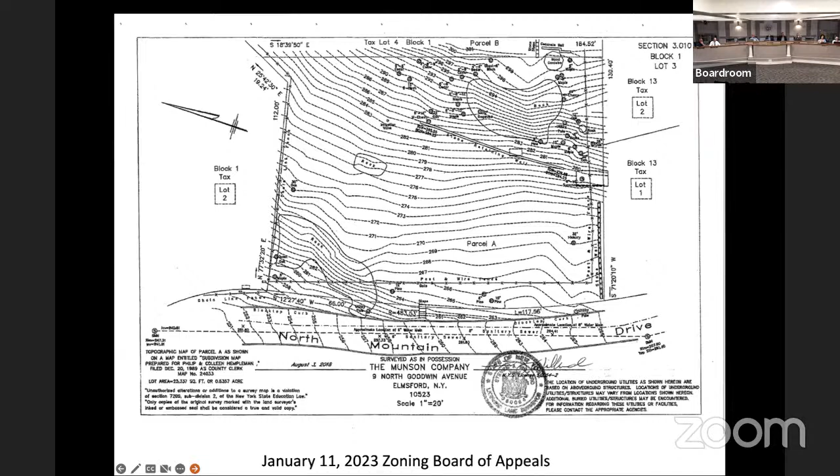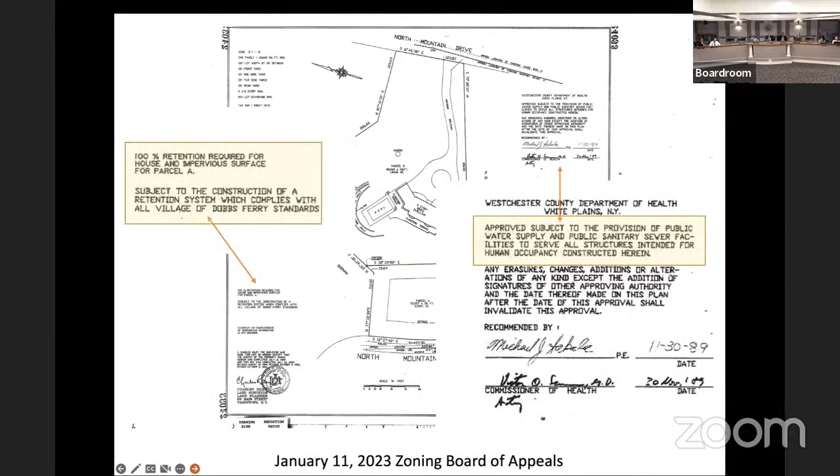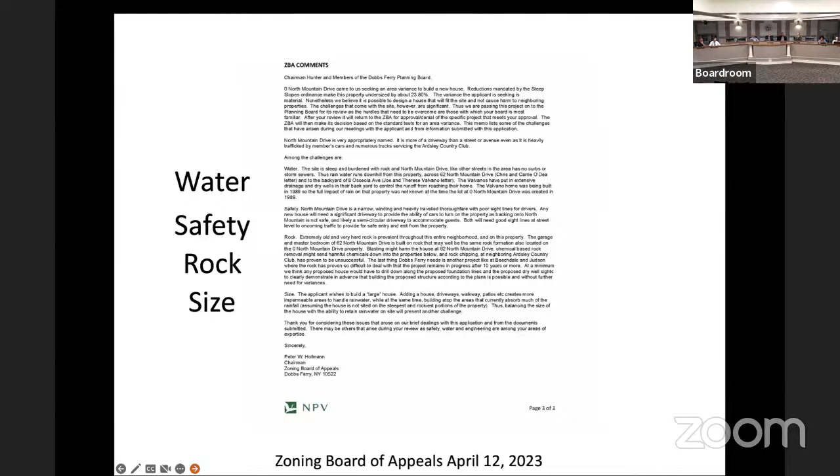So what we got when we went back to the planning board was the comments that this board put forward, which really identified water, safety, rock removal, and the size of the house and how it's going to relate to the site. What we did then is we broke that into a series of things that we went into deep investigation, brought in engineers to work on all of it.

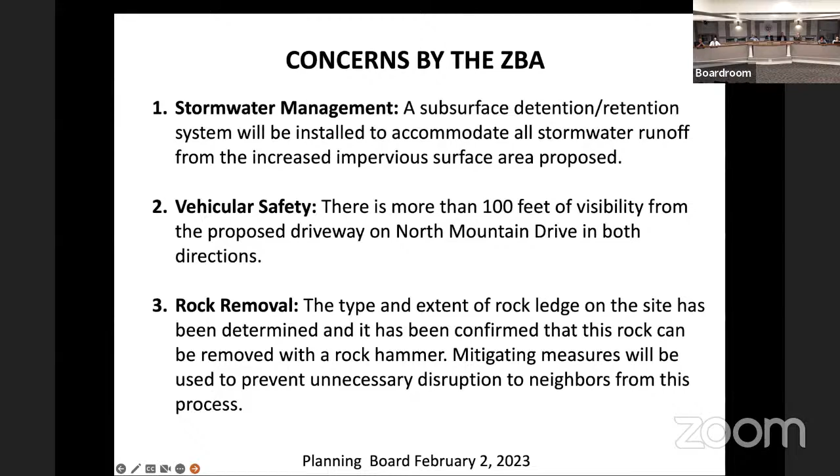We broke those down into stormwater management, vehicular safety, rock removal, the size of the house, site stability, landscaping, and then at the very end, we ended up adding contextual compatibility because there was some concern with how would this house fit in with its neighbors, which of course is important to the planning board, I believe also important to this board.

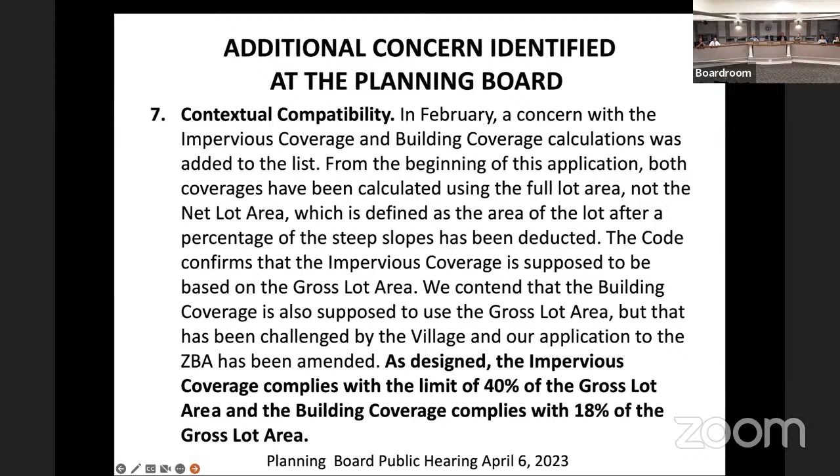As I understand the second issue, and I'm not going to talk about it, but we did design it to be 40% compliant, 40% of gross lot area for the coverage, impervious, and 18% for the building coverage of the gross lot area. So that'll be a different discussion.

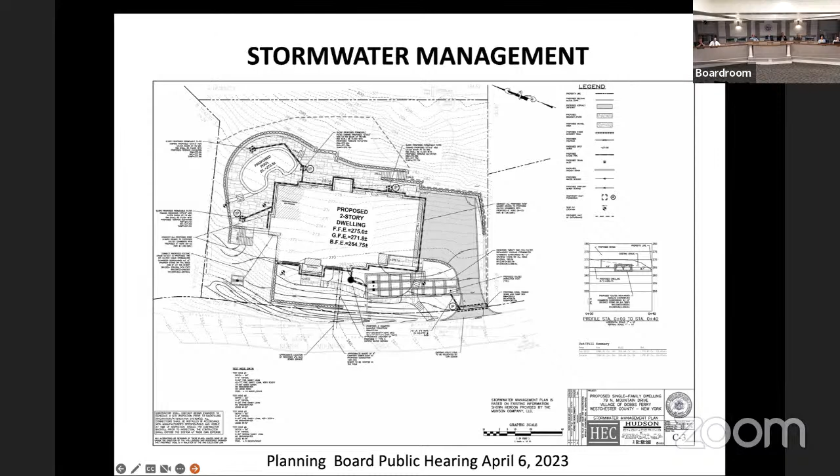This is the drawing that we produced that was done by Hudson Engineering that actually shows the answer to your question. Mr. Gutman, the Cultec units are actually sized out, the location, their placement on the site, everything that has to do with solving the water for full retention on site, not an overflow situation, not doing a percentage of it, which is actually the standard. This holds all the water that we're taking on site that's falling on impervious surfaces that we have and controlling that on site.

One other thing I'll just say quickly is Hudson Engineering did their whole study on the assumption that all of the surface area we were creating was impervious. We actually designed all of the paving on site so that it is fully pervious, not just one of these things where water can get between the two rocks, but actually there's a real space. And then we put additional gravel below that so we can hold all the water that falls on the terrace on site without depending upon the system that the engineers have designed to lose that water. So we have a factor of safety of like 30 or 40%.

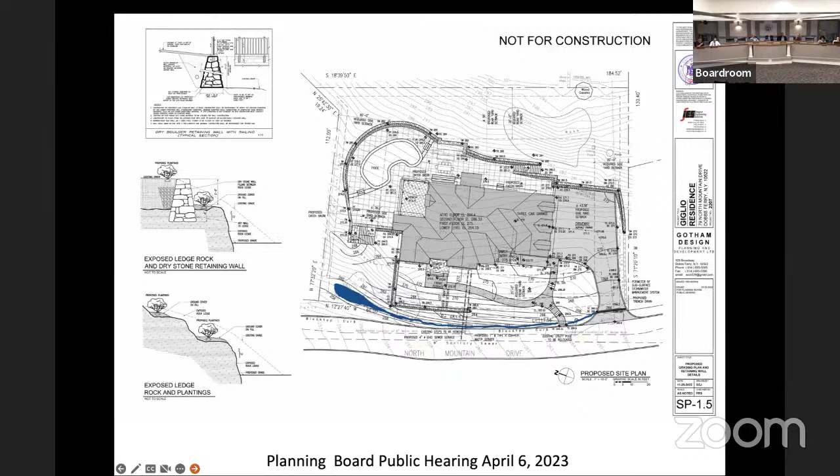We then took a look at the concerns and comments that were mentioned, and realized that, well, we're capturing all the water that falls on ours, and one of the concerns expressed was the water right now is shedding down the site. There is no curb, it's jumping the curb, going across the street and running down the hill. So what we did is we actually created a swale along the street and a drainage basin that's a backup system. So if any water gets around something, we're still controlling it on site. And that basin is fully on the property.

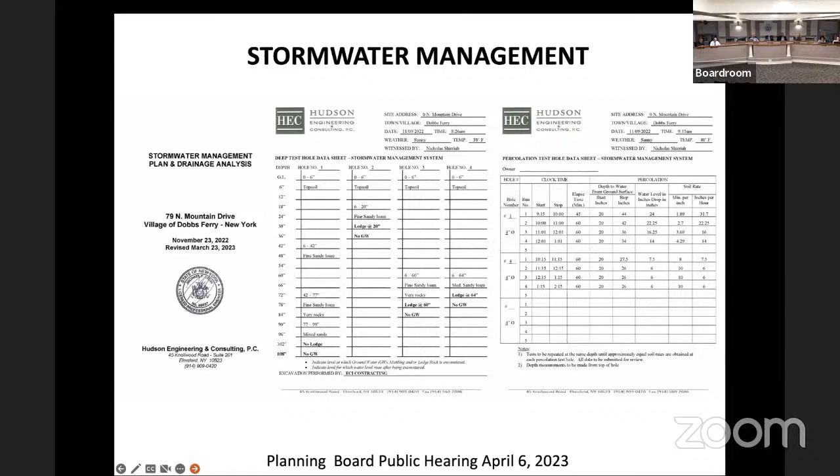The stormwater management design was based on a full stormwater management plan and drainage analysis prepared by Hudson Engineering. They actually did the perc tests. They did the deep hole test. They found the areas where these Cultec units could be placed. So they did a full design. It's not hypothetical. This should be considered what you'd have as completion for your project.

So the important thing in the stormwater management report is that the system is designed to fully accept, no release, the entire stormwater runoff volume for the 100-year storm event from the watershed and exfiltrate the runoff into the surrounding soil. So that's the definitive statement made by the engineer.

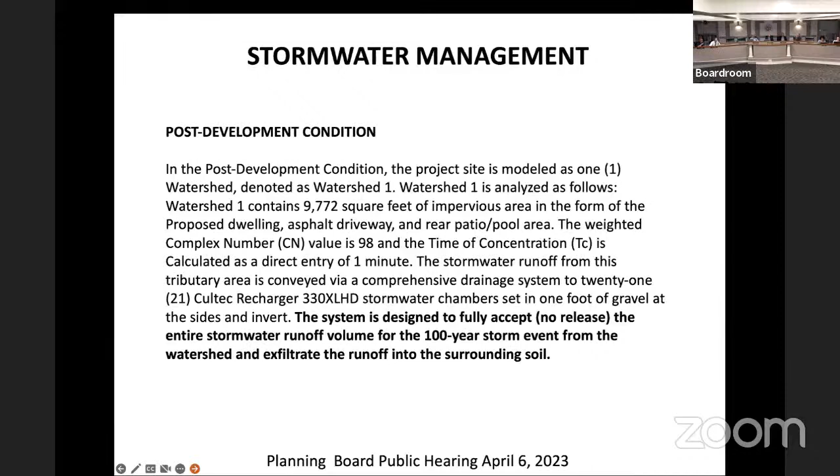Concern with rock removal. This board mentioned that. We were aware of a property in town where they've been removing rock for 10 years or something. It's crazy. So what we did is we took a look at what the actual capacities, quantities, and process would be for rock removal. We went into a full analysis of that, and Hudson's role in that was to confirm our quantities and the details on that, as well as to put together a fairly sophisticated erosion sediment control plan, so that during construction, if we have water running on site, we're not adversely affecting neighbors. So from the start of the project going forward, it's all going to be dealt with.

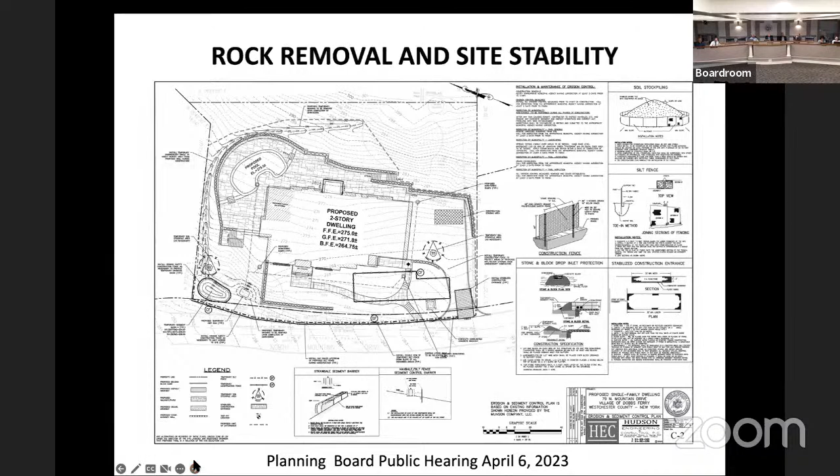We prepared a report on the excavation and mechanical removal, calculating the number of trucks, frequency of the trucks, size of the trucks, size of the equipment, how it would be handled. And we had that reviewed by our structural engineer, Sirus Miandoabi, who attested that all of the numbers in there were accurate and reasonable for expectations of what this would really entail.

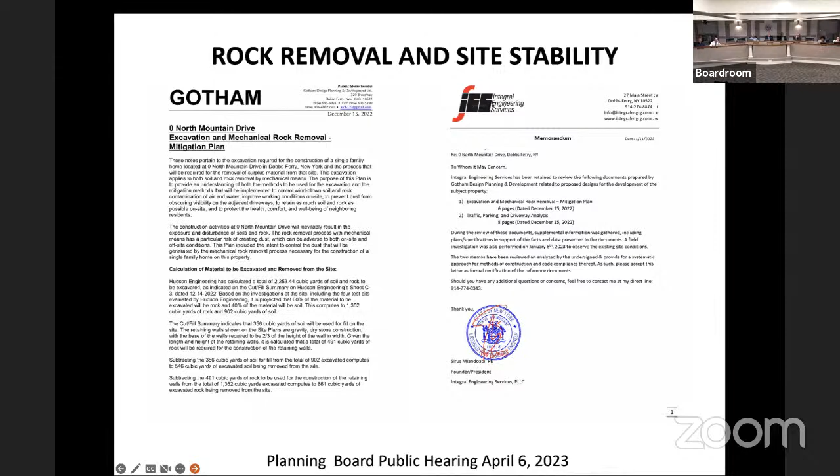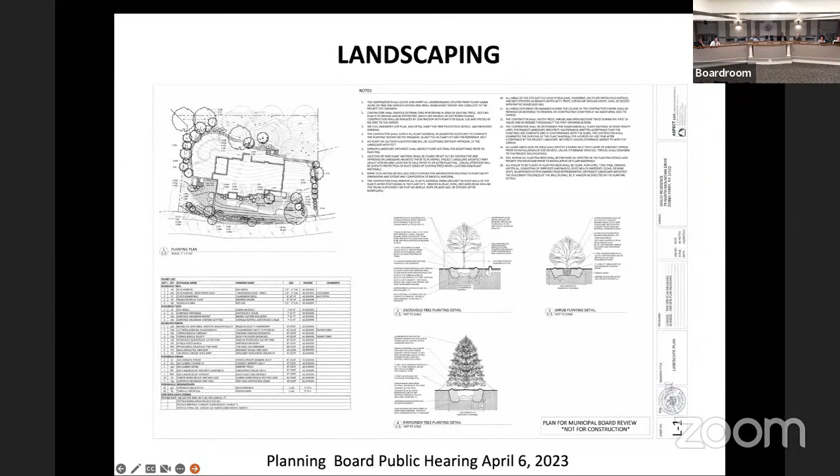Another concern that was expressed at the planning board, which I think was one that you actually mentioned at one point, is the extent of landscaping. This is a rocky site. Can it accommodate robust landscaping? And it can. We've actually had the landscape architect, Susan Janchil, do a full landscaping plan for this project, including screening for all the retaining walls and anything else that we're proposing to build. So that's been prepared.

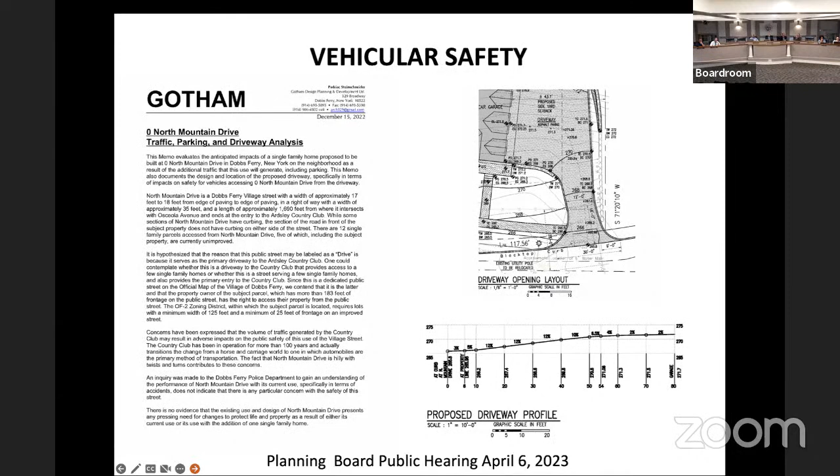Vehicular safety came up. This is a driveway, if you will, to the country club. There's significant traffic that uses that road. We're proposing a driveway that's going to come onto that. Is it safe? You have visibility in both directions. So we designed the driveway. We have pitches on the driveway that meet all acceptable standards.

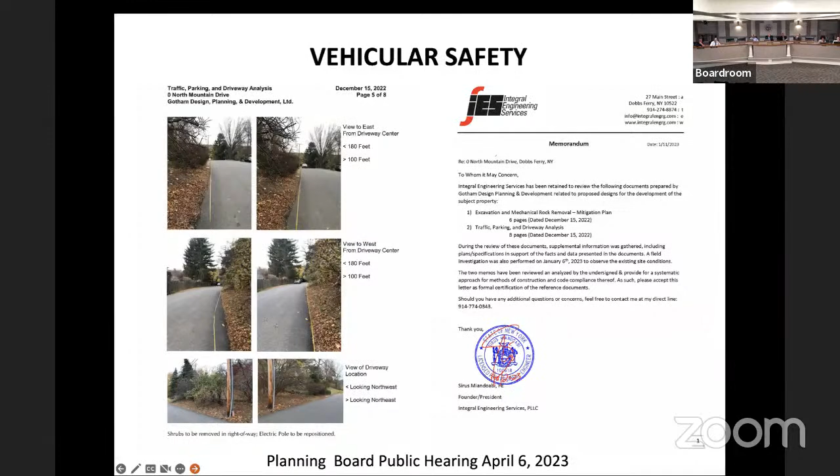Actually, we took photographs with the tape. So we've determined that we have more than 180 feet in both directions, which would accommodate cars going at 45 miles an hour without any question, still be safe. I think anybody who's driven up there knows that people should not be driving more than 45 miles an hour up there. I think 25 is the posted limit. And again, this was reviewed by Sirus Miandoabi and determined to be consistent with all engineering requirements.

The size of the house and the context compatibility. We did 2 reports on that. One, analyzing the building and impervious coverage calculations, which I think will be a comment for the second part of this. And the other is the context limit area and how we compare to neighbors. And we determined that of the 11 parcels that we evaluated, 6 of them, the houses were larger, 4 of them, the lots were smaller. We're kind of in the middle in all of that, which I think means that we're in a reasonable position with the context of the neighborhood.

We actually did get a letter from one of the neighbors expressing a concern and voicing a positive that this house will fit in well with the character of the houses in that neighborhood, which is an unusual character. Usually we're talking about houses that are going to look too big. The fear there was the house was not going to look like it really fit. In other words, not big enough. I think we've got it working fine. And we got 2 letters delivered to us, one from the O'Connors and one from Josh Weiss and his wife, that were favorable to the application.

We also, at the last meeting, talked about how we've had our engineer do all this stuff. It's been reviewed by the village's engineer. The neighbors also hired an engineer. I don't know if he's on tonight, but he appeared at the planning board and he gave a fairly positive reaction to everything that we're doing.

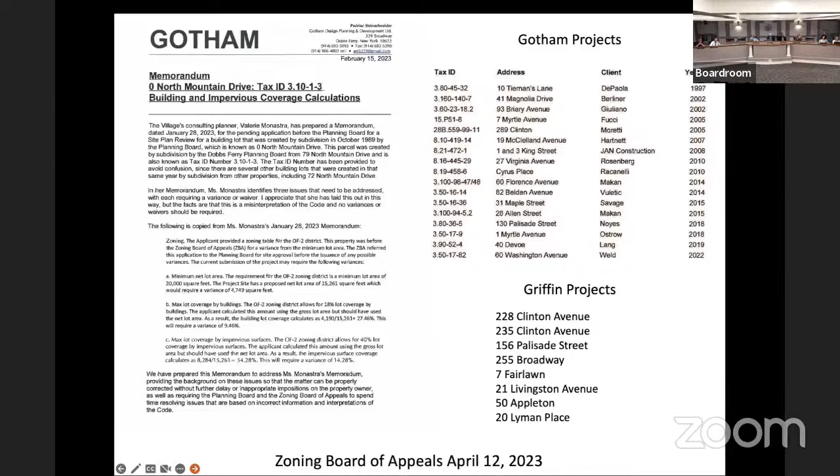The only thing I'm going to say about the coverage calculations is I've been doing work in Dobbs Ferry since the late 70s. Since the steep slopes ordinance was adopted, all the projects we've done, except those involving a subdivision at the same time, both the site coverage, impervious coverage, and building coverage were based on the gross lot area, not the net. Christina Griffin was here the other night when we made the presentation. She sent me a list of the 8 projects that she's done the last couple of years, which similarly used the gross lot area. So I don't know if that factors into anything, and I don't think you want me to waste your time showing you the pictures?

Okay, just checking. They're nice pictures, beautiful houses. We've had a long time to learn about this. Yeah, so they're all great.

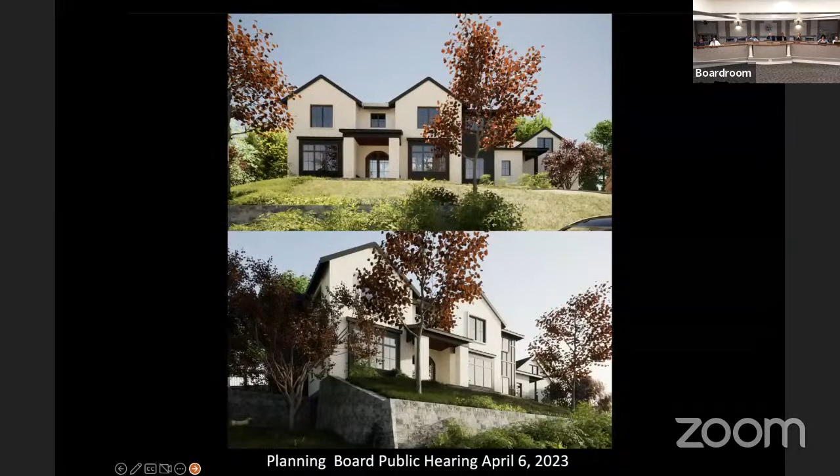And then the pictures that we've developed of the house that we're proposing and how it sits into the site. I think it's a house that looks appropriate, fits the site really well, and I think it would be a positive addition for the community.

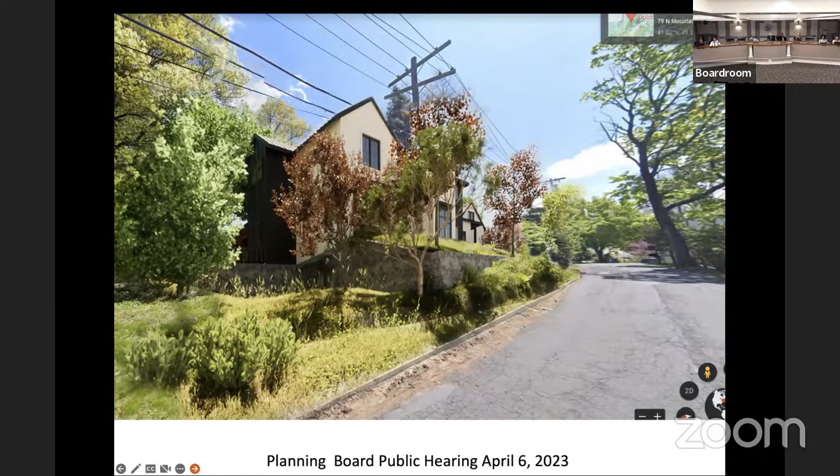Okay, is there anyone else who'd like to be heard on this application? Sarah, anyone else from Zoom land? Okay, why don't you put them forward?

Hi, good evening. I'm Jim Anacarico with Cronin Engineering. I was retained by some of the neighbors to follow along with the project from the very beginning.

Turned into mainly just looking at stormwater, possible negative impacts regarding stormwater to some of the downstream neighbors, particularly the Valvanos at 8 Osceola. Was happy to report back to them that the planning board and your village consulting engineer really held their feet to the fire when it came to the design of the stormwater system.

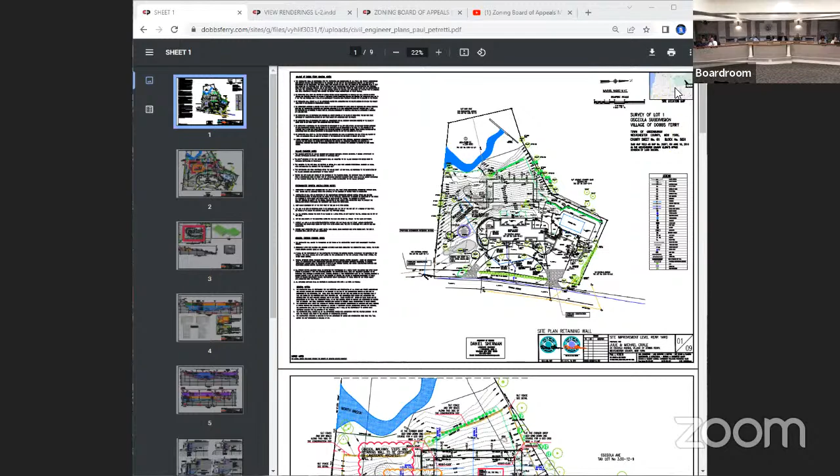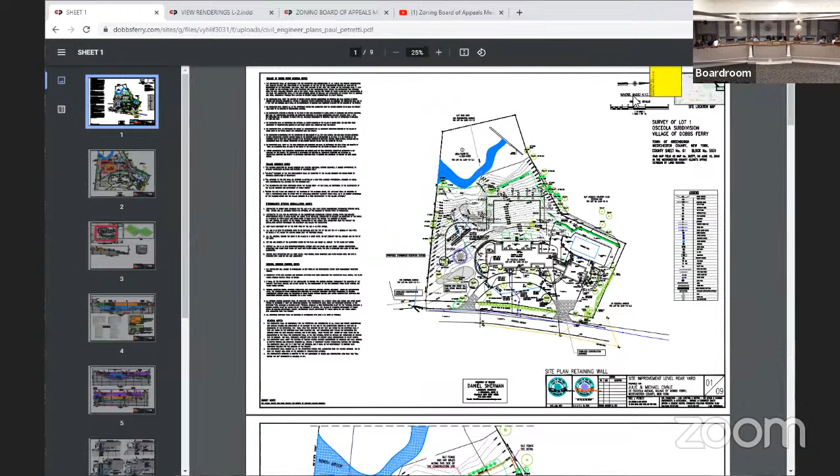Okay. And the next item on our agenda, if I can find it. Are we 25 Osceola? Yep. Is 25 Osceola. And this is per Village Code 300-42, fences and walls shall not exceed a height of 6 feet in side or rear yards. The proposed wall is 11 feet at the rear yard, thus requiring a variance of 5 feet for the height of the wall. Who will be heard on this application?

Good evening, Paul Petretti, civil engineer for Julie and Michael Savali, 25 Osceola. And the landscape architect, Dan Sherman, is with me to help me get through the application. So this is the overall site plan. There. So what I've designed is a retaining wall system. And the reason behind this, it's a very steep slope piece of property. The natural grade over here, the worked grade in the backyard is 27%.

And we're trying to level this area, and we're gonna try and level this area, and this is 20%, so it's pretty steep. And the grade is not uniform. This wall has two wall systems, which is what we call wall number 2, which is the upper wall, which is the higher tier. And this is the lower. So it's a tiered wall system over here, and this is a single wall system over

here. There's a very big gouge in the ground here. Topography runs this way and that way, and this drops about 10 feet right there. And it's kind of an unsafe set of circumstances. So the rear yard is very hard to deal with, to play in, and so we're here to seek a variance. And again, it's a wall system. So let me go through the heights of the wall. I'll try and do it here, and then I'll go to another drawing, which is for detail.

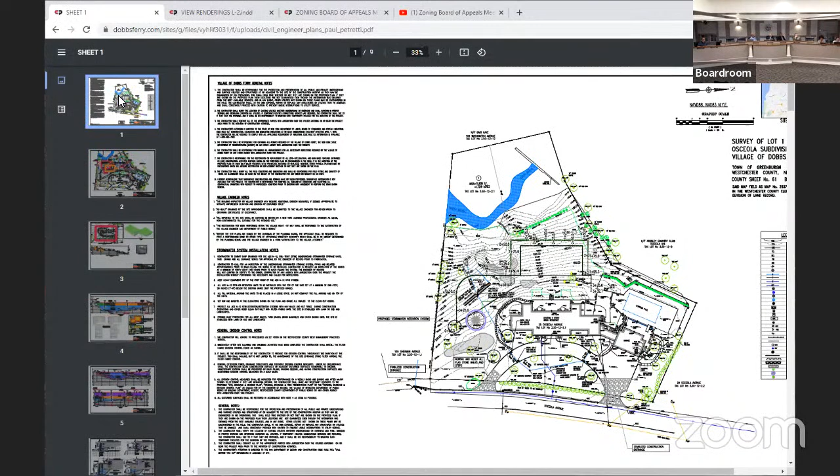There's a walkway. They want to put a garden down here. This picture shows you some of the roughness of the site. That hole right there is that. So that's basically the application. Maybe you'd like to hear from the landscape architect? Yes, that would be helpful. And I think we really need to concentrate on the landscaping that is to the neighbor on the left of the house as you're facing it. Yes.

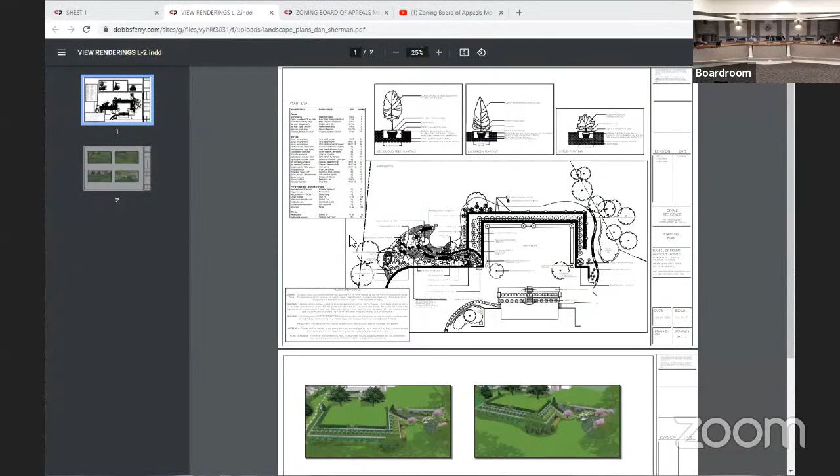Hello, Dan Sherman, landscape architect. We've created some 3D views with the SketchUp program to show the intended look at the beginning, not at full growth, but at the beginning of the project. And we show screening between the terraces of a spreading juniper. The computer makes it look like little puffs, but in time they would sprawl out to conceal the 6 feet. And below, we've put arborvitaes and dragon lady hollies, things we've found to be deer resistant.

And then I really love this little gully that he calls a gouged out space pit. We like that. It's going to become the best part. We have a stone stair that will twist down in and some weeping trees, and it will be really a lovely little hollow garden, kind of like a secret garden. And that will have spreading ground covers and perennials and spireas and junipers and things in there.

To answer your specific question, the view from the south, I don't think this view has caught up with it yet, but since Mr. Savali spoke with the neighbors, we've added to the planting plan to propose some Norway spruce and some green giant arborvitaes to come up along that southern side.

Above, it's going to be very neat and formal looking with a lawn and a hedge that I feel supports the look of the house. It's symmetrical to the house too, and it's a nice courtyard kind of lawn feeling up above. The other lawn is just a lawn. I've put a split rail fence around it so it looks more natural, and it has a view out into the woods and down to where the creek is. I can answer any questions.

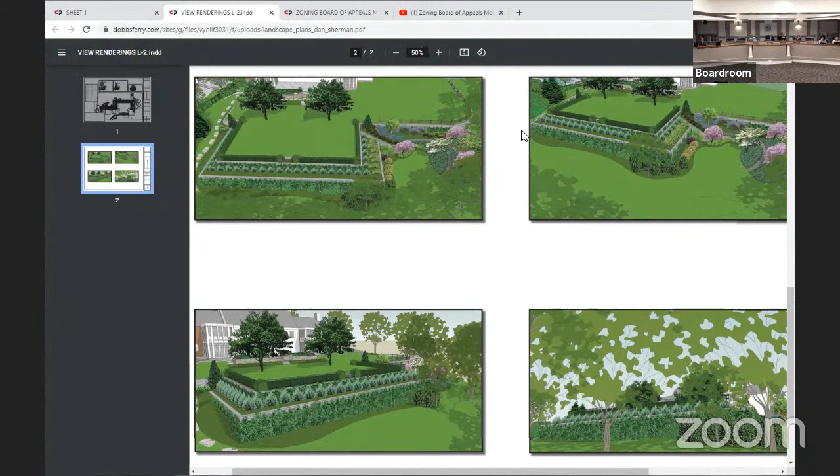Why, maybe cost is not a factor here, but why not pursue a cut and fill type of approach where you come out of the house, you have a flat area, and then you step down a little bit, which allows you to cut and fill and reduce the height of these walls substantially? Paul, you may want to come back, but we did come down a little. I mean, it's a huge amount of fill. But it helps. There's very little that you can capture by doing that.

Well, I was there. We go down about 3 feet first. If you're lowering the level of this terrace, it's just a lot less fill that's required. And if you're coming out from the house a little bit, it seems like cutting down. This is not a design review thing. This is more about just reducing the impact of what is a really substantial structure back there. They do have it stepped down a couple of times here. See the one here, John? John, I was thinking the same thing that you just said, so I would be interested in hearing Paul's explanation.

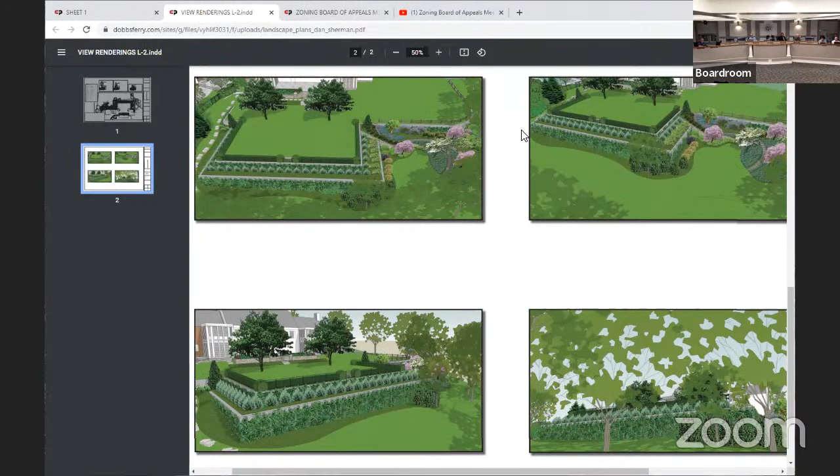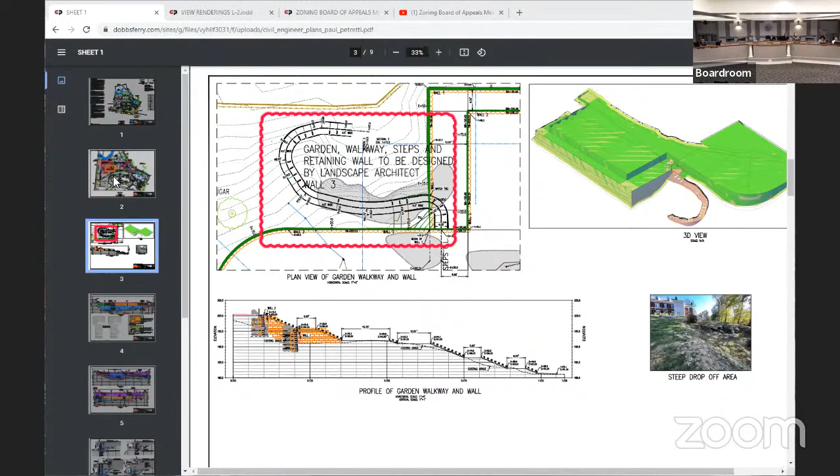So, let's go back to the other drawing. Okay. Well, you always have to consider both. So, when you come out of the section, the patio, this is a patio, right? Flexible patio, it's at elevation 207, okay? Then it goes all the way down to 188 over here. And I'm trying to understand the question, okay?

There's ledge rock here, okay? I didn't do any test pits here, but I'd put money on it, there's ledge rock there. All these rock outcrops are here. It'd be very hard to cut that, okay? Very difficult. There's another aspect of building these kinds of retaining walls. This wall can't sit on top of this wall. It has to be set back, with the difference in the height of the walls. It's a wall system. And the whole idea is to carry the 200 all the way across, so you can have a flat area here and a flat area there. I don't know if I'm answering your question, but I'm trying.

Let's see what it is about the steps. So we did slope down about 3 feet from there to get down. Yeah. It's because of the rock, you couldn't scrape it up. There's definitely rock there. And that's rock that maybe Mr. Steinschneider can move, but Mr. Petretti cannot move that rock. I'm sure that removing the rock is costly. I think that building it up this big is just as costly. There was a picture, I showed you the rock there. I was looking at pictures that I just took a couple hours ago. I was there, walked all around. It's real hard.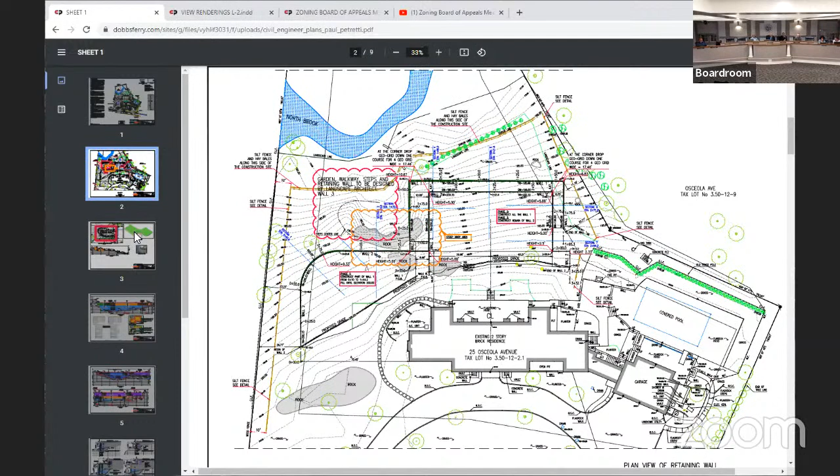Is there anyone else who'd like to be heard on this, Sarah? Or here? If you'd give us your name and address, thank you. I'm Wendy Sibley. I live next door on the round side where the trees are, at 155 Sherman Avenue. Been here 30 years.

Our feeling on this is we totally understand the desire to create some playable land, although the slope has been there since the Cones and probably before the Cones and the Lockharts. I mean, it's always been there. It was there when they bought the land. And we don't have an issue with a retaining wall that's of height that is permittable by code, 6 feet on the side yard. Totally seems reasonable.

A wall of this height, which they're proposing, concerns us on 2 levels. One, it's forever. It's a wall. You can put trees up, and as we all know, trees can get blown down, things get eaten. They're not there forever. Walls are forever. It is 2 or 3 times my size. It is almost the size of a building.

And on top, I assume a wall of that height would need some sort of fence work to prevent kids from falling off, so you have another few feet on top of that. It's a substantial structure. I just don't think it's appropriate. I understand the need for a wall, but not that height. I also think it's going to impact our property, how we view what we see, how we enjoy our property. And I think there's other ways to achieve this.

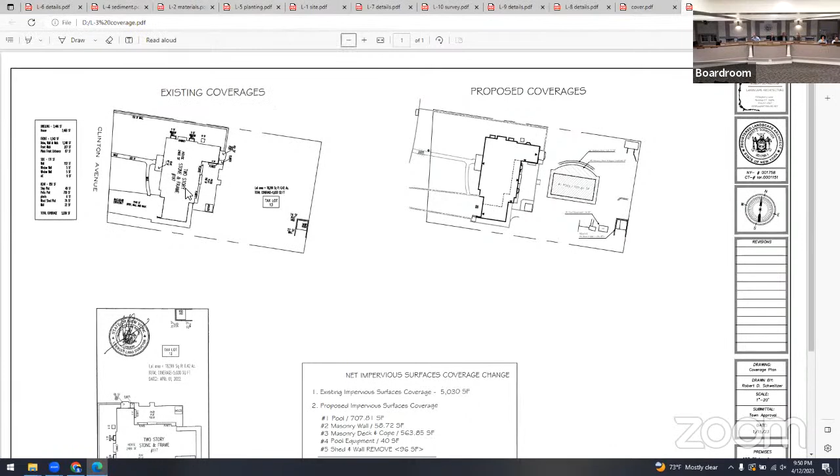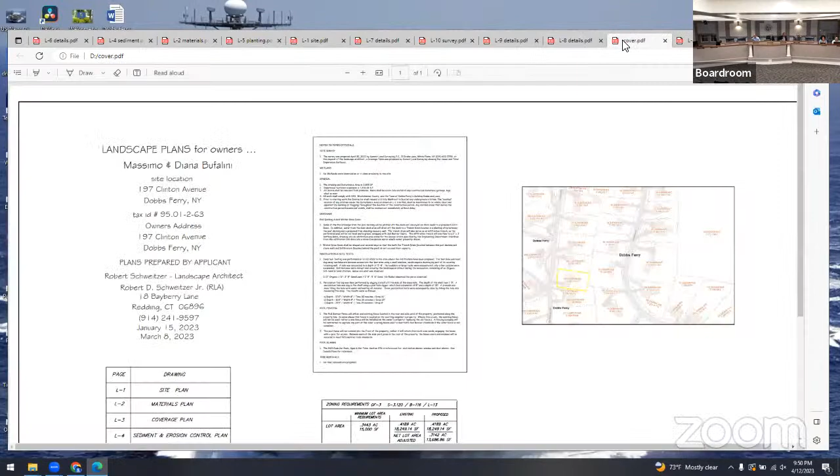Clinton Avenue is over here, the driveway, the pool is going to be in the back here. Okay, right over here. First of all, I'd like to say that my client has reached out to some of the neighbors, and he has a letter of support, and he has also been in conversation with a couple of the neighbors, and they have supported this.

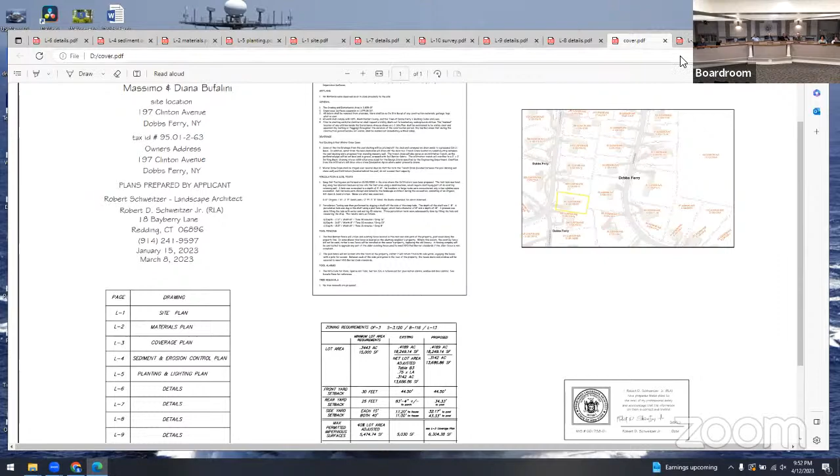Okay, so let's go on to L1, site plan, please. Okay, this is the road here. We penetrate the site over here on the side yard. This is the pool. There's some decking around it. Garden wall, which actually acts as a retaining structure, not a high retaining structure. There's only a couple of feet of grade that's being held back.

Our stormwater is gathered. There's a swale that brings water around the pool on this side. There's a catch basin that drives the water through a curtain drain here because the deck also pitches towards this. This runs out to a pretreatment, and then there's a Cultec chamber here. There'll be an overflow out here. This is where all the water drains naturally. The system was sized by a civil engineer, and it's been sized to meet the town engineering code.

Obviously, when we're done with you, we're going to go forward with engineering and building, and they will review this. When I looked at the site, looking at the property line at the top. This property line? Yes. This property seems to tilt slightly toward the neighbor's property. Are you going to regrade that a little bit to make sure that runoff doesn't occur?

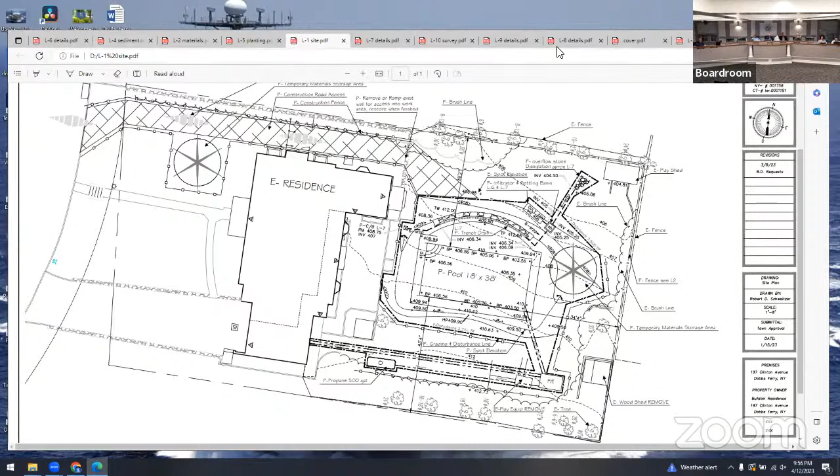You see the structure itself. Let's go to L2. Here it is. A lot of this stuff will be layered off, and you'll see more of the design itself. That's perfect. So this is what we have. It's a very small deck, as you can see. They have a patio here, which will serve for a lot of the sitting area. There is a small sitting area over here, and this again is your planting area, which is going to have the drain. So that's your catch basin here. You don't obviously see the infiltration unit over here.

It has a reel on it, so it will cover up. And there's a walk on this side, and that's it. I mean, it's a very simple proposal.

There's a garden wall here, which from grade here at the patio level will be elevated 2 feet. All right? Because things slope down over on the back of the wall, the highest point on the back of the wall, I think, is 3.5 feet. But then it pitches up to about 2 feet on each side. And that's just, we're working with the lay of the land here. That's the way it wants to be.

It's a very simple proposal. There's nothing more to it. We have fencing. There will be privacy fencing that's going to go completely. There's existing fencing over here, which is privacy fencing. There's existing fencing over here. There's going to be 6-foot privacy fencing that's added over here, and then come around to a biparting gate. So this is all pretty well screened.

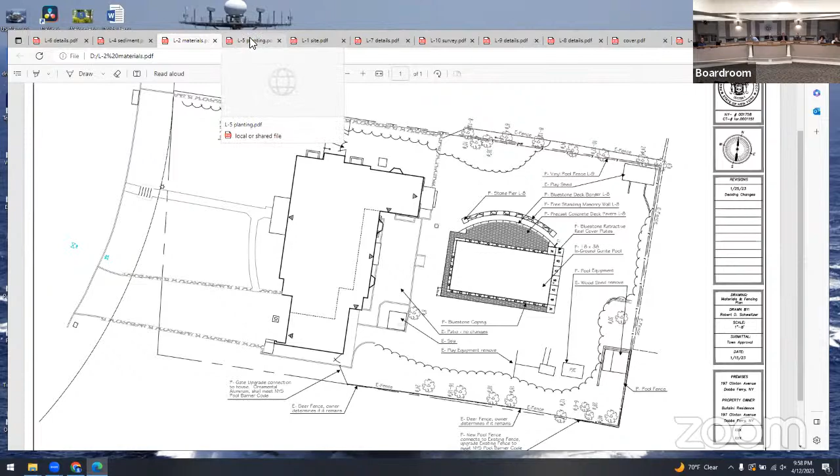If we go to the planting plan, I've massed in some plantings in this area, some heavier shrubs to fill in. Thank you. And you can see this brush line here, these are all trees. These are underplanted with hydrangeas and some viburnums, some larger hollies. And they will mass together. These shrubs get to be about 6 feet tall. And that's the goal, is to just really contain all of this with high shrubbery. Again, the wall is behind that, but that's just a second layer.

There's some ornamental plantings around the pool, just to make that more appealing. There's an existing step that comes down into this patio here. There's 2 small lamps over here, and I did receive some feedback from the building department on that, and we are going to comply with what they request. That's it. Like I said, it's a simple thing.

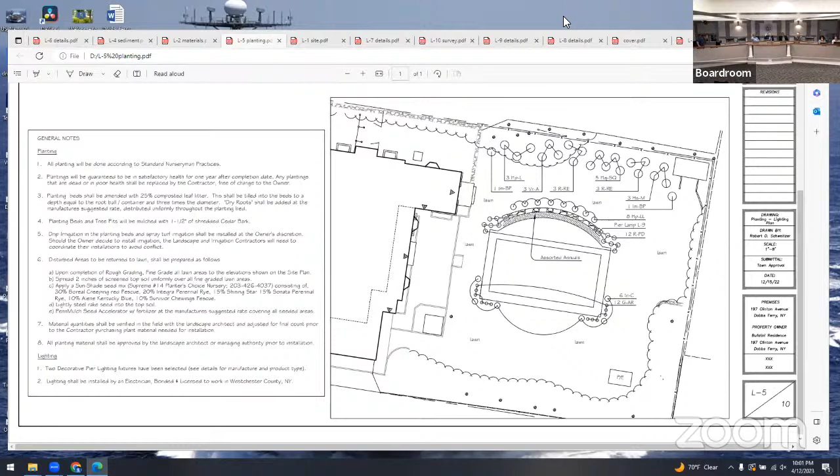So motion to close the hearing? Second? All in favor? Motion to approve the variance legalizing permissible impervious surface coverage, this lot of 6,304 feet, as per the drawings submitted as part of this document. Second. All in favor? Good luck to you. Well, thank you. Thank you, Board. Certainly welcome.

So did you enjoy the entertainment to start with? I mean, I was getting more nervous as it went on. There's no way. Lucky if they don't lose the hot tub. Hot tub! Next time you'll insist on being at the top of the agenda. Oh, on the other hand, maybe you tired us out. No, I'm more interested.

Matt, one question. Sure. For the next steps, there are 2 other meetings. Do we attend those? Is this it? Your next step is going to be the planning board. You'll make the application to the planning board. And we show up then? Yes, when you get put on the agenda. Did you submit for the planning board already?

I think we submitted for all 3. When we sent the certified mail, we checked for all 3. I think I told Sarah I put 6 more. Okay, I just need the right amount of drawings. I believe it's 4 sets of drawings for the planning board. We submitted those. Okay, well, then you'll be on the next planning board meeting. I'll have Sarah email you tomorrow if there's anything missing. Yeah, I'll check. All right. Thank you very much. You want another set? No. I think you need to close the meeting.